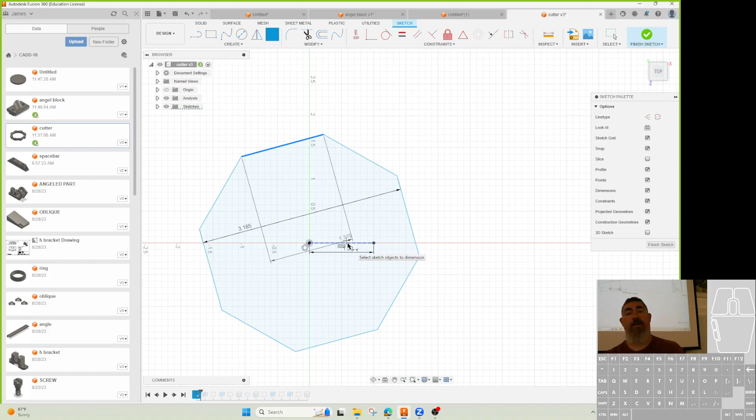And I dimensioned an angle from that horizontal line to that edge, and that turned the octagon. So other than that, this octagon turns - I turned it the direction I wanted to go. And I dimensioned from here to this line, just a horizontal line I drew, and told it 10 degrees.

How did it not just try to do the length? Because whenever I've done that, I try to do the length. If the lines are not parallel, it's automatically going to give you the angle between them. Oh, okay, that's useful. If the lines are parallel, it's going to give you the distance between them. Gotcha, okay thanks, that's what I didn't know.

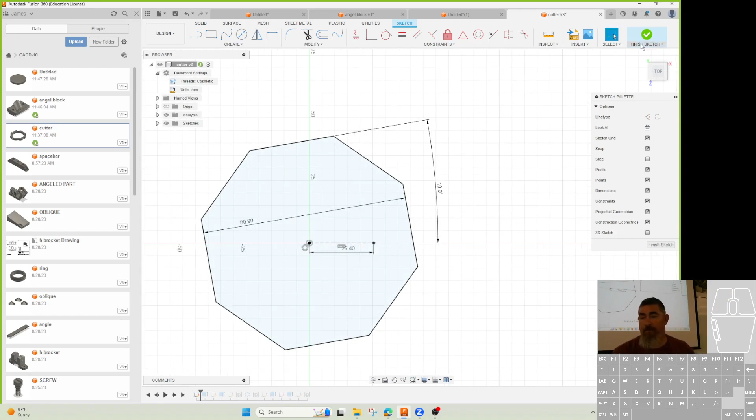And then it should be showing in metric - there you go. So I did that one, I extruded it. I did that little piece.

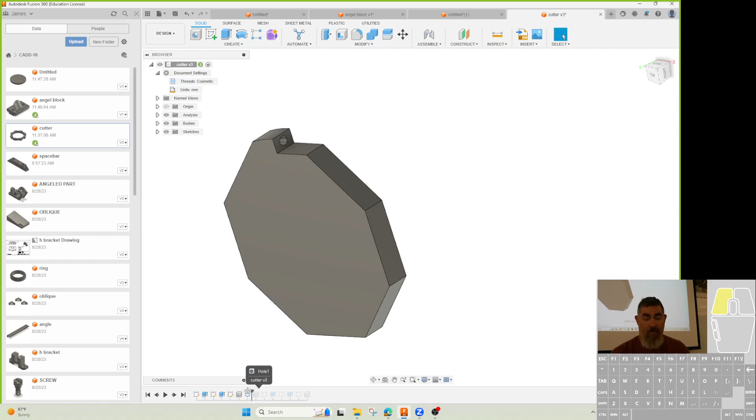So I just kind of extended this edge out, drew that in, extruded up to it, and then centered it on the face, patterned it, and when I did the pattern I just turned on the suppress, and I suppressed that bottom one.

And then I made the hole, and then I had to fill that bottom back in. So if we had done it on the circle first, then cut those out, and patterned those cuts, it probably would have saved me a step. See, this is the first time I did it - I didn't write out a plan first. See what happens when you don't write out a plan? You don't figure out the best way to do it.

How did you do that filling there, with the part to fill in that part? I just drew a circle from here out to the corner, then drew a line from there to there and had to line up. My favorite kind of sketch is this kind you don't have to put any dimensions on.

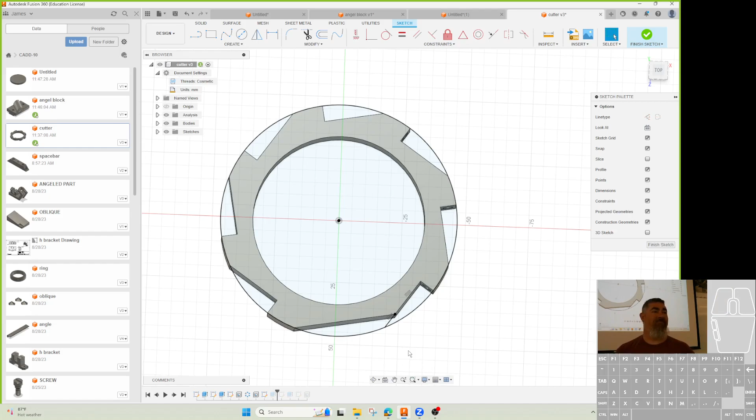And I just extruded that piece down, then extruded - so I did that line down, over, up, and then made the two sides equal. And then I drew, actually on the inside here, because it's going all the way through, I drew on the inside because it was already flat, found the midpoint, did my hole.

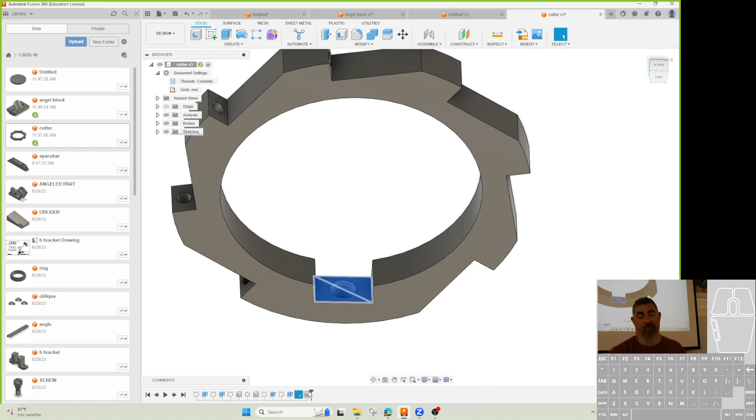Okay, makes sense? And so I needed to adjust this because this thing, if it's going to be turning, it probably should be balanced or close to being balanced, right? And so if we go to inspect - so it'd be on a shaft, and then the whole shaft would turn. That's what the keyway is for, to hold in place.

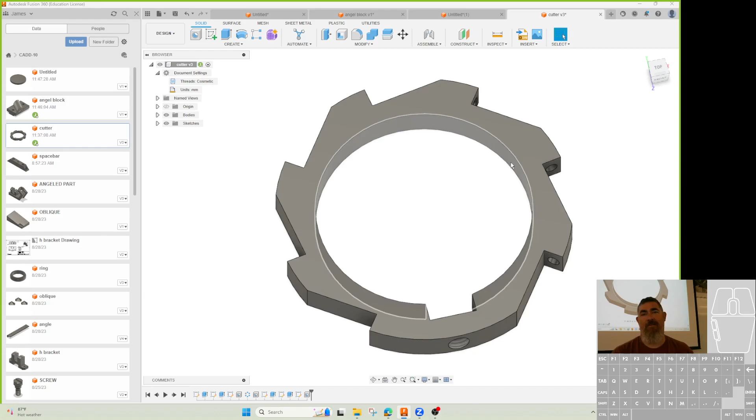What axis is it spinning? This axis, the blade side. It's going to turn around this circle here. This keeps it from sliding up and down.

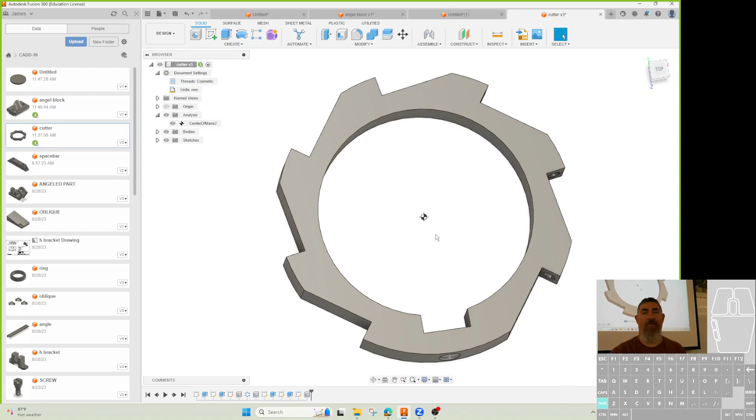Oh I see, okay. And so if I go to inspect and go to center of mass, I can pick on a part, and that's going to give me a little button there for the center of mass of it - so where that center is. And if I go back and look at the top and turn on my origin, that's pretty close.

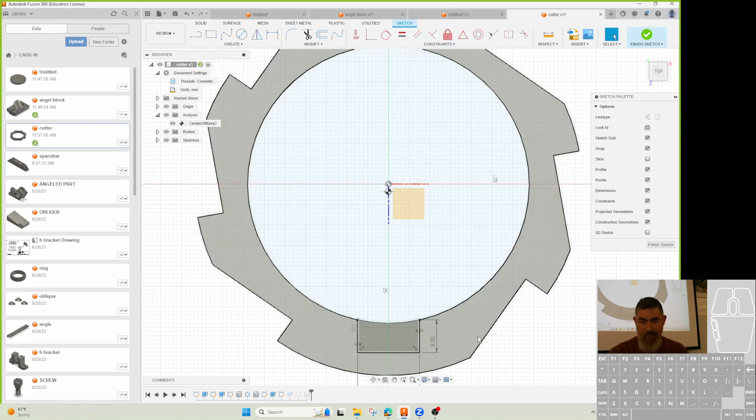It's off a little tiny bit, but before I started adjusting my slot, I had this at like 10. Actually, that moved it up. But you can see as I'm editing it, it's showing where it was at that step. And I can kind of move where that is based on changing the size of that slot, because it's changing how much mass is down there to get the center moved back up.

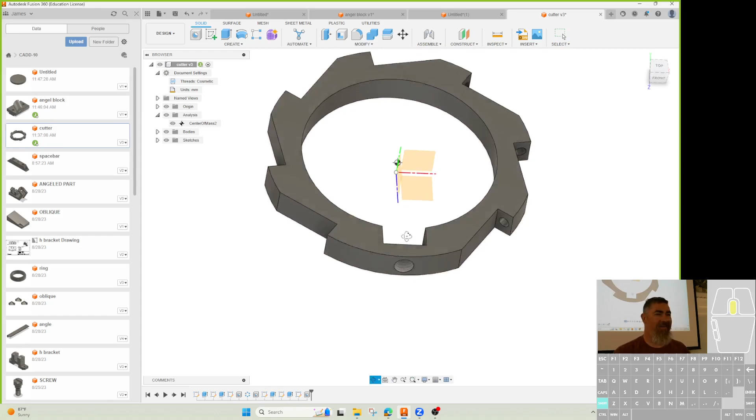And so I just kind of did that till it was close-ish. Again, this is something that if we were actually doing would spend a little bit more time. But also, these threads aren't cut right, it's just that - so if I do the modeled threads, that might move it now too.

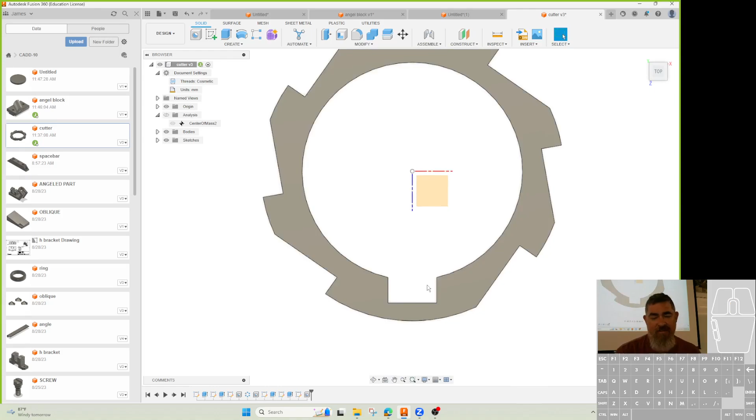So you can just turn off the analysis here to turn that on and off, and you can use that to kind of adjust the size of that slot if you want to. Again, I'm not being super picky on it, but I want you to get the general idea. So yeah, maybe try it by drawing the circle and cutting it. So what size circle would you draw?

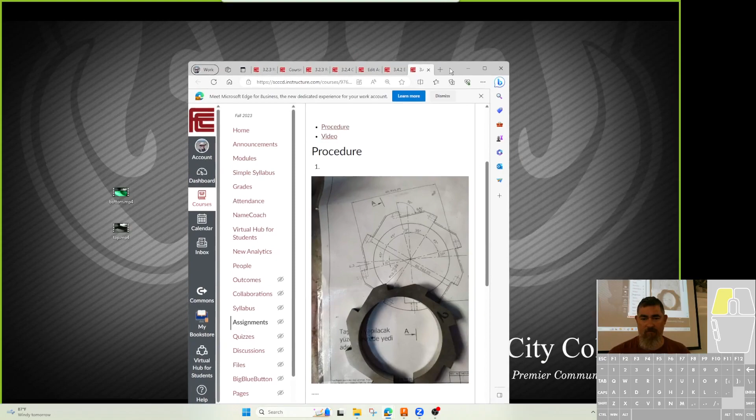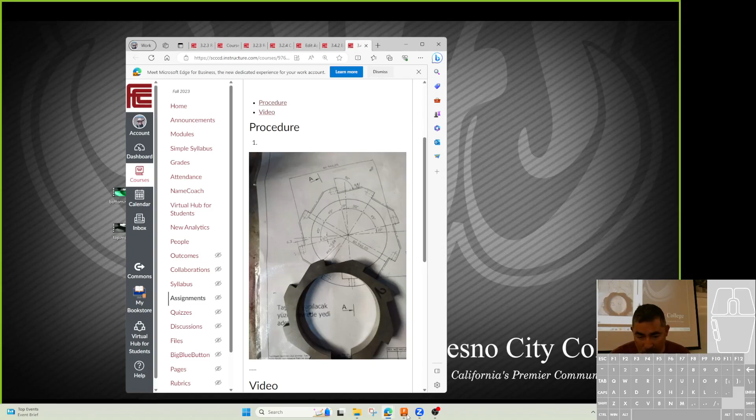I thought you'd draw a circle and then draw - so if I did the circle first, and dimension the diameter of this, it'd probably be that 89.5 divided by 2, or no, 89 plus - there we go, plus, what is that? 80.9, so 80.9 plus 2 times 6.

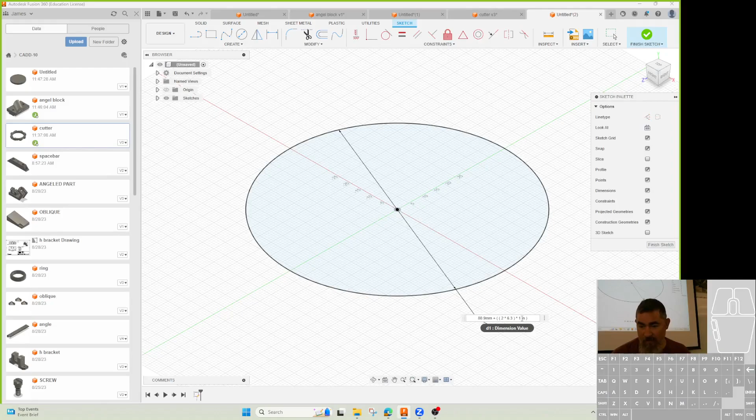6.3, yeah, I'd have to put that in, because I'd have to have that 6.3 on both sides. Yeah. Millimeters, millimeters, and millimeters - there we go.

And now I can extrude that up. Might be worth it to change your units for that. Yes, I should probably do that - I keep seeing you had it done and then.

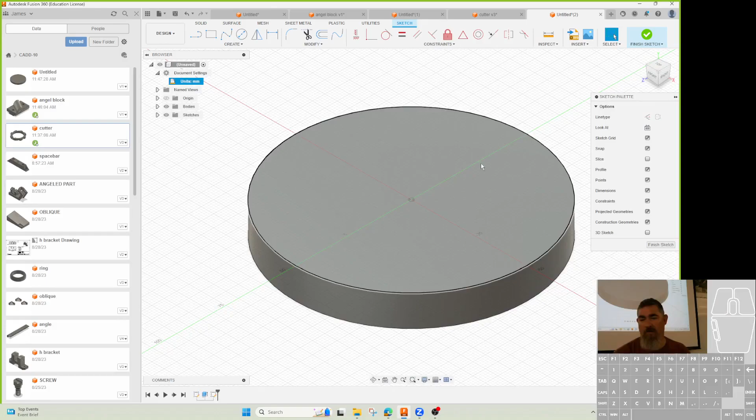And then I can just go in and create a sketch, and draw a line from here to here to here. This line needs to be coincident with the origin - I need to have a sacrificial line here. And now I can dimension from there to there by 10, and from there my 6.3.

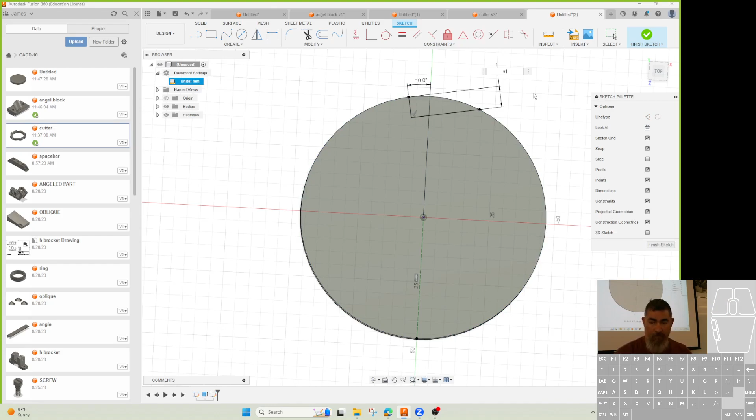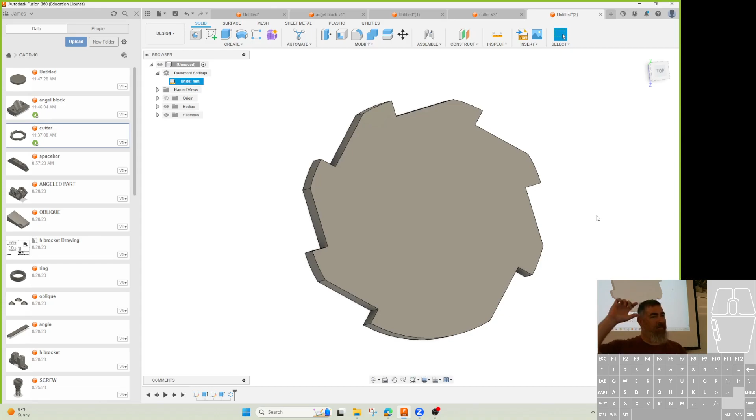And now I can do my pattern - there you go, so yeah, that's better. See, sometimes the first time you attempt it is not the best. That's why if you spend the time to come up with a little plan first before you just start drawing, you come up with a better option.

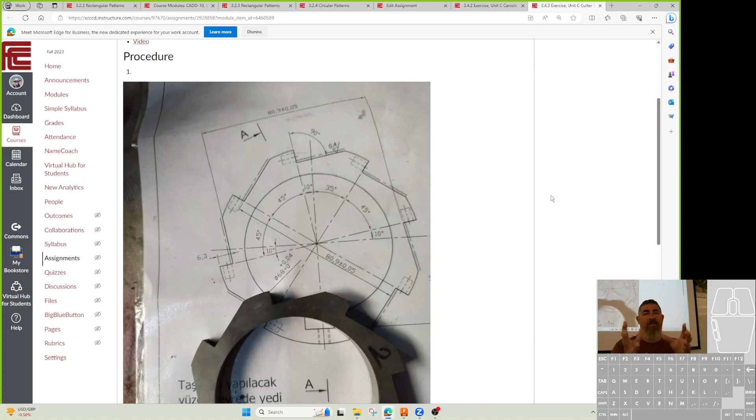Okay? So, any questions on this one? No? So, see, things that look hard, really not that hard. That's what I want you to try and start getting, just how can you break it down into easier things? Okay? So that's going to be the rest of this week.